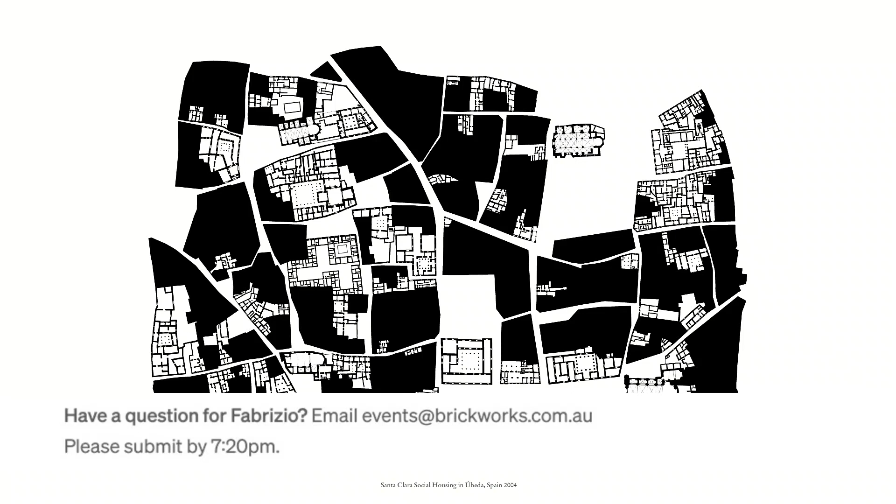It was a small project for a cultural center and social housing in a small town in the south of Spain. Essentially it tried to find a way to integrate a new architecture into a very sensible and delicate historical context.

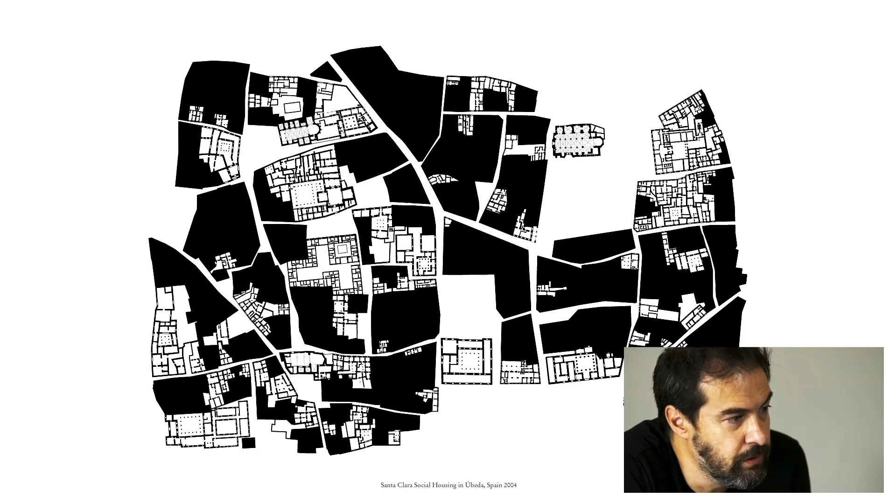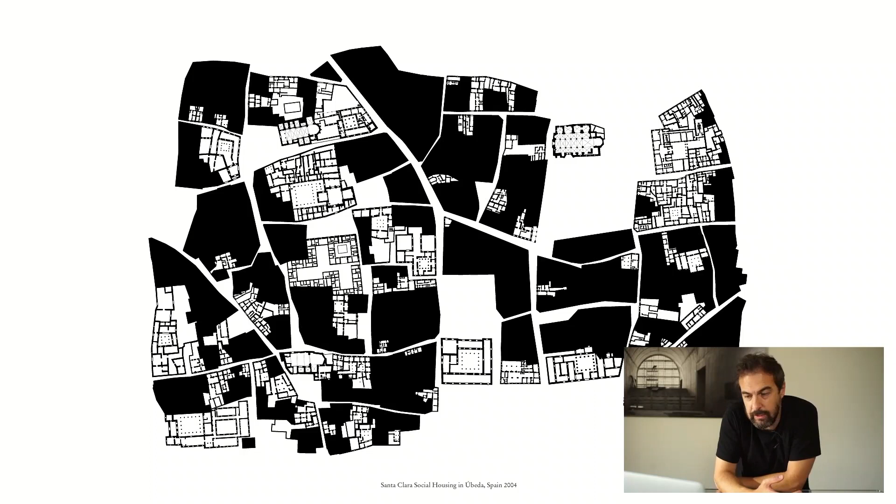In a way, this project marked our attitude towards architecture. Since the beginning, we tried to work with what we found. We tried to work with the specific condition of a place, to establish an intimate relationship with the context - physical context, imaginary context, or with the different realities that exist in a place. So this idea to work with specificity marks all of our first career here.

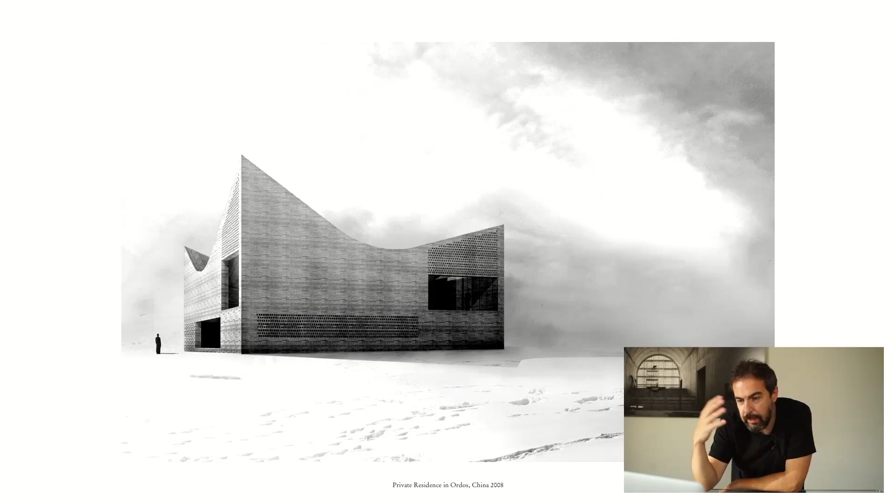In a way, our work is based on this idea to work with what we found, with this idea of specificity of the place, but at the same time we are conscious that architecture is an autonomous object. So at the end our project is based on a dichotomy. On one side we're trying to find this intimate and sensible relationship with the specificity of the place, but on the other hand we try to give a certain formal autonomy to the building. And exactly in this dichotomy, in this paradox, is where our work is placed.

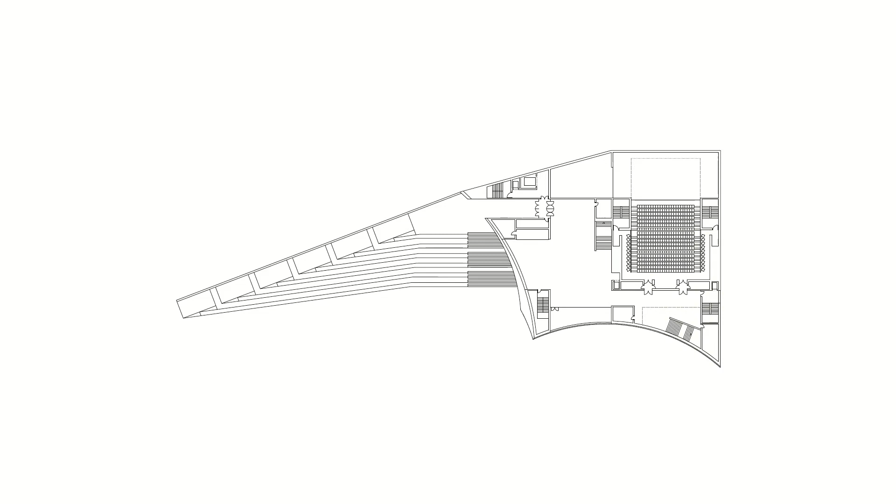Here, for example, this huge long ramp and stairs are the urban element able to connect the object through its contextual condition, and it marks the beginning of a promenade, a public promenade that goes inside the building. The interior, the foyer, was considered a covered plaza open to the sea, from where other connections move to the upper level.

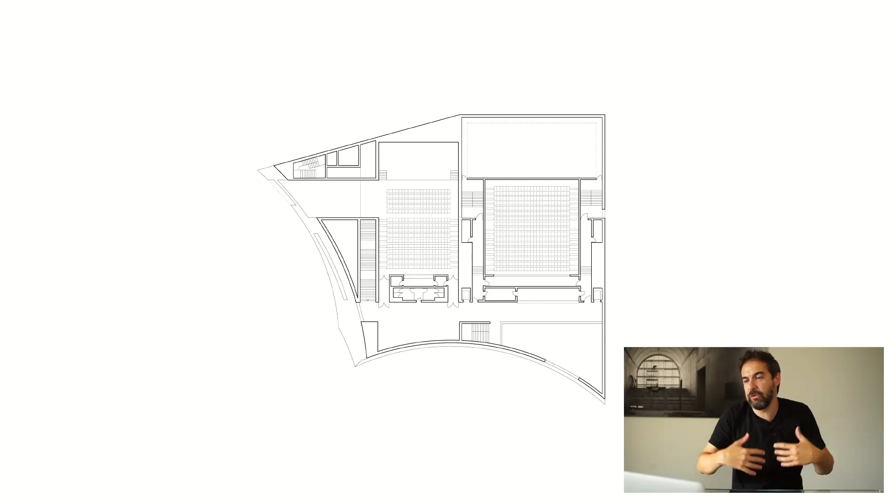All our projects have this plan trying to be very simple, very synthetic. They try to solve a complex program through a very simple form. Here the plan shows very clearly this duality that exists in the project: from one side, how the project is facing the geography, the sea, and on the other side, how the building conforms the new alignment for the city.

With just these two elements, all the project in a way is solved. Interior, there was a small theater that is present in this image.

More or less in the same year, in fact we finalized this project at the same period as the previous one. We made a project for a small office building that controls a wine quality facility, in a small town in the north of Madrid. This project has been really important in our career, because it's probably the project that explains in the best way our attitude toward architecture.

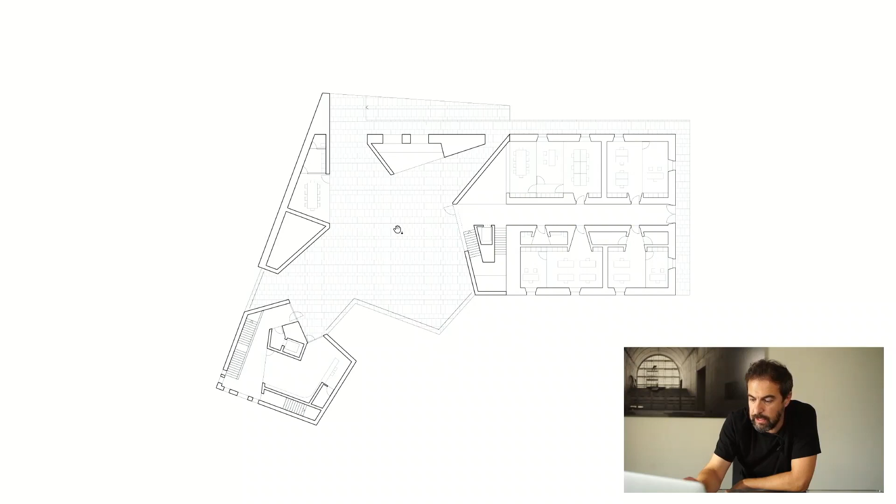There are several fragments that complete the existing context with what we have found there, and then the tower that marks the limits of the project and the public space inside. This is another view of the roof, in which, as I told you before, the architecture is just the frame of a new public space. The architecture is modeled by thinking about urban life.

You can find this kind of reflection not only in this project, but in all our projects. Similar to the very first image I presented, there is this effort to integrate new contemporary architecture into a historical condition, discovering new scenarios, new possible ways of new possible architecture.

After these two first projects, which were quite important for our career, we started to work around Europe, especially in Poland, and then later in Switzerland. The very first important project we made internationally was the Philharmony in a city called Szczecin, in the north of Poland, very close to Berlin.

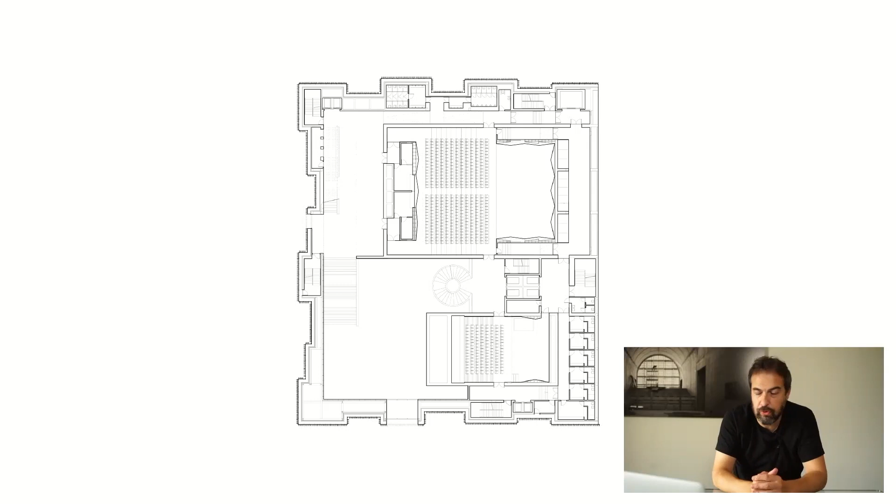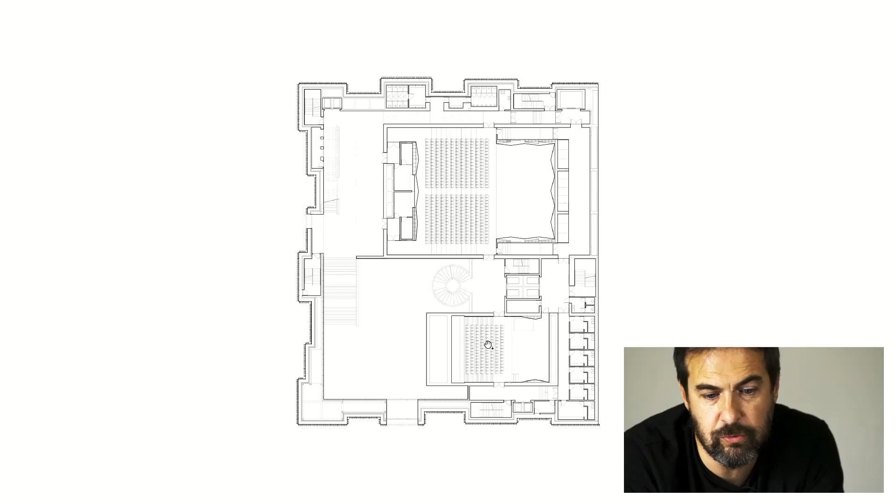The plan is a very complex project, but it's solved in a very simple and precise way. There is just this crown that conforms all the technical and vertical connections. This crown generates an interior open area, some kind of public space, and the two main uses—the chamber hall and the Philharmony hall—float inside of this void.

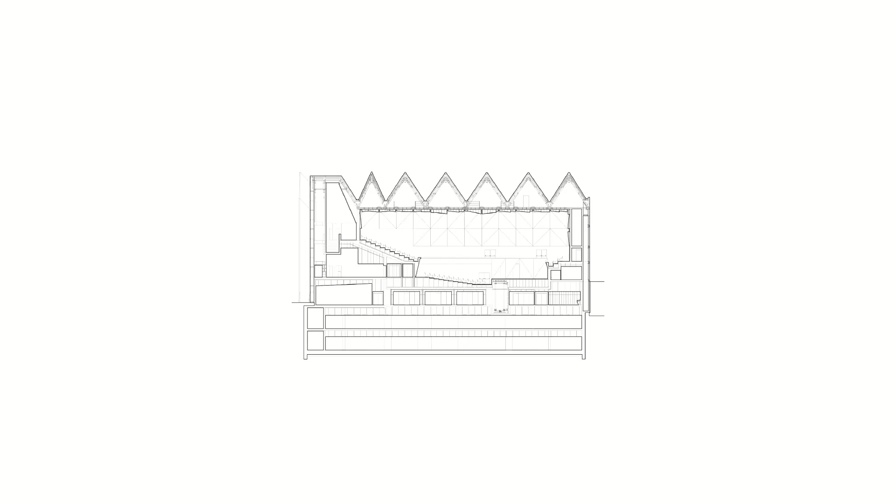So in this case, the public space goes inside of the building. The foyer is conceived like a covered plaza.

The other important use of the Philharmony, the big concert hall, is essentially a reflection about a certain historical typology of concert hall of Eastern Europe. A certain idea of ornament present in historical chamber concert halls has been adapted and transformed into fragments that are ornamental but at the same time technical elements that achieve the best acoustics inside this room. Again, it's a reflection about a certain specific tradition, even in these interior spaces.

The project was really the first step of a big urban renovation of an entire part of the city, and for that reason the project changes its appearance during the night. It tries to express the interior activity of the project and makes an effort to help renovate this area.

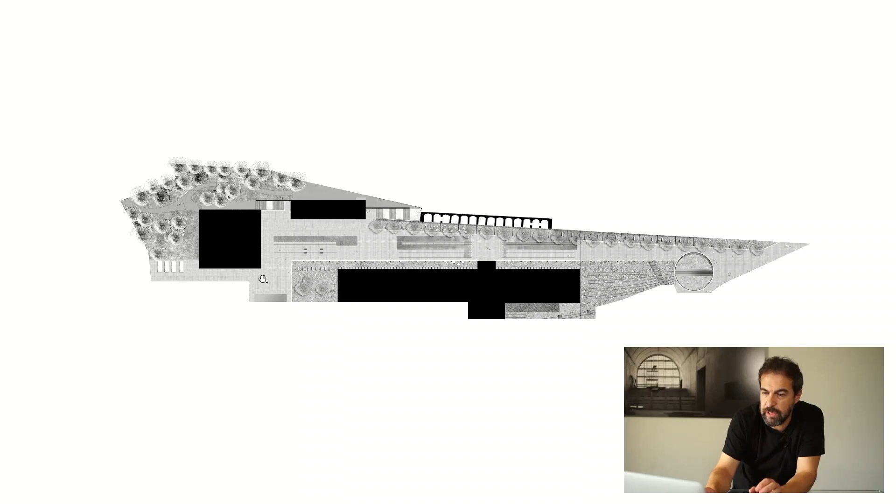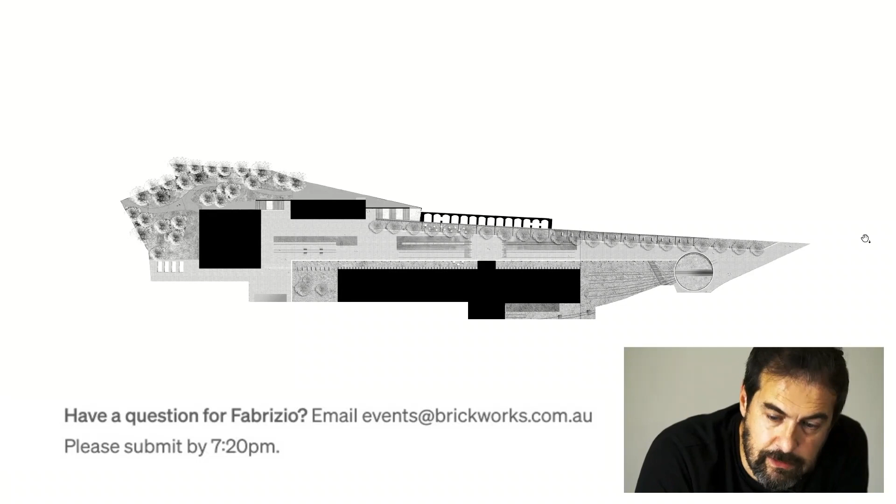This drawing clearly represents our strategy. At the heart of the project, we essentially defined a long plaza, a long esplanade able to connect with the plaza in front of the street. With this element, the effort was to link this new district for art with the city.

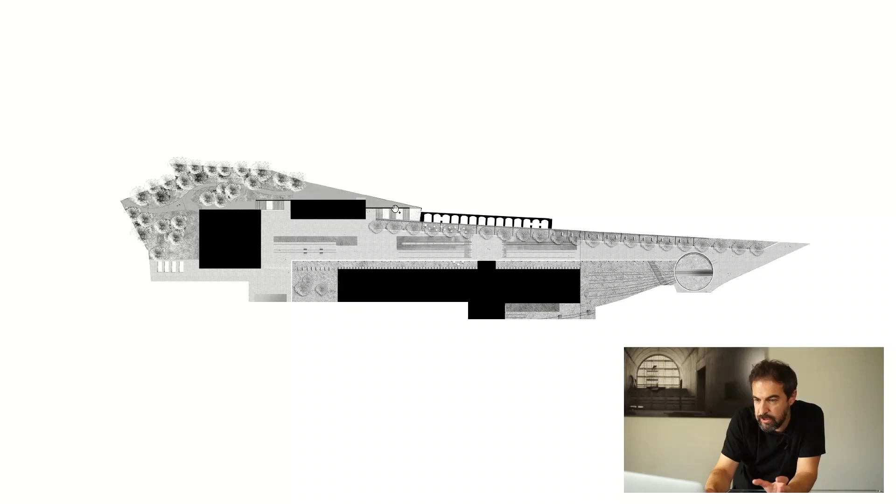The three museums essentially conform the frame of this new urban space, similar to the project I presented before, but at a different scale. This strategy was really important, representing the first step of the project: clarifying the urban condition of the site, and after that, the Museum of Fine Art that is here.

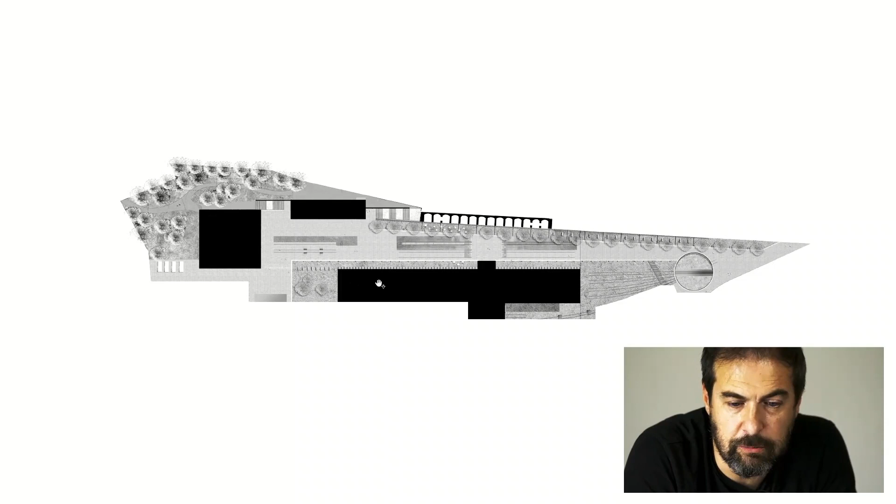The concept for the museum arrived in a very simple way. The project sits along the railways, with an inhabited wall able to conform this new public space and to protect it, and also to protect the collection hosted inside the building from the railways.

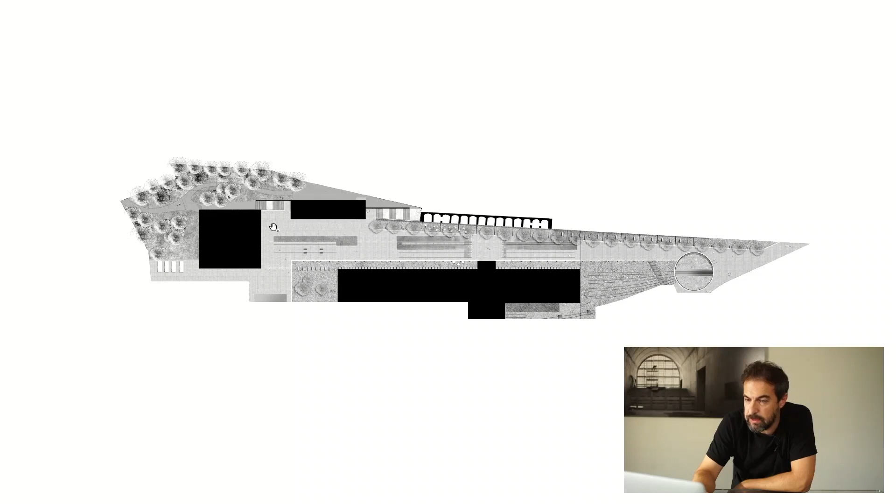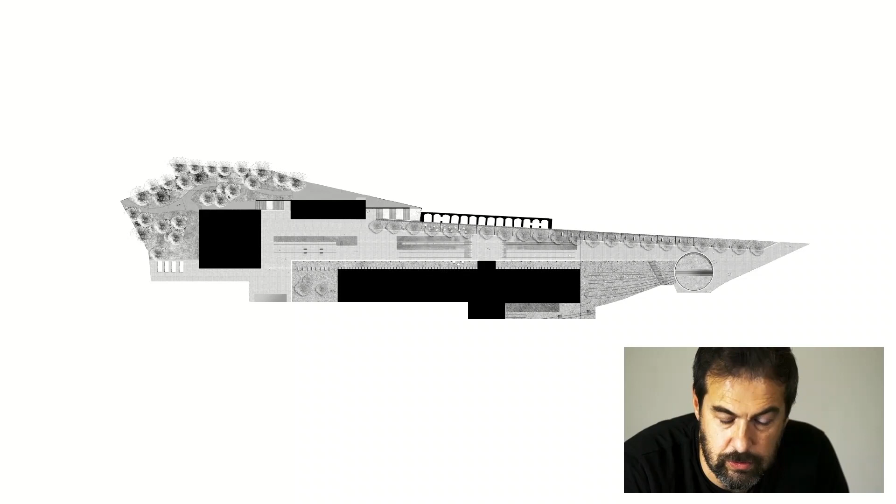In order to elaborate this strategy, several old buildings were demolished, but we preserved certain fragments here, there, and also this one, because our intention was to conform a collection of fragments of the historical building to give continuity to the memory of this site.

There is a certain industrial resonance in this project. We wanted to preserve this industrial atmosphere that was present in this area, which essentially was an area for the maintenance of the train before. So the museum is this kind of long inhabited wall, very abstract in a way, an independent building, but trying to reuse this industrial atmosphere to conform the new project.

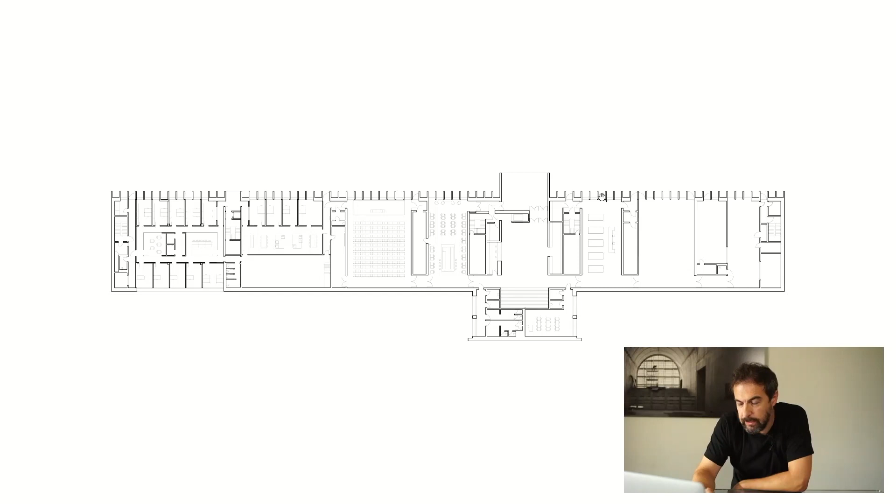Here on the ground floor, essentially the entire floor is composed of public use: the auditorium, restaurant, the foyer, etc. This vertical element gives a kind of abstraction to the facade, but at the very end what it permits is to achieve a huge permeability between the exterior public space and the interior.

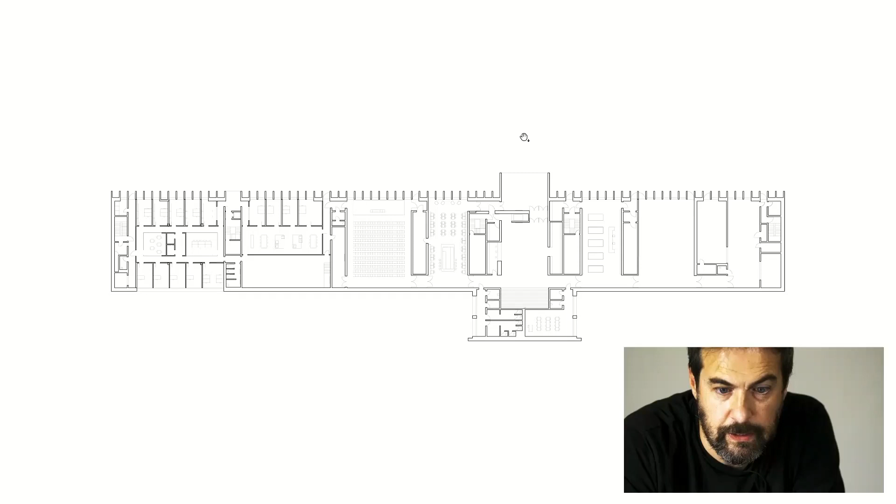The fragment of the pre-existing building is the key element because we reuse it to conform the new foyer, the main entry of the museum. This entry is marked through a simple porch that opens a void into the vertical rhythm, and when you arrive here, you discover the new foyer.

Around the foyer there are vertical connections, some small spaces before arriving at the gallery, working with light and simple materials. The exhibition on the first floor, the galleries, are very informal in a way, bringing light through the north facade and in between the vertical elements. The upper floor is essentially characterized by zenithal light.

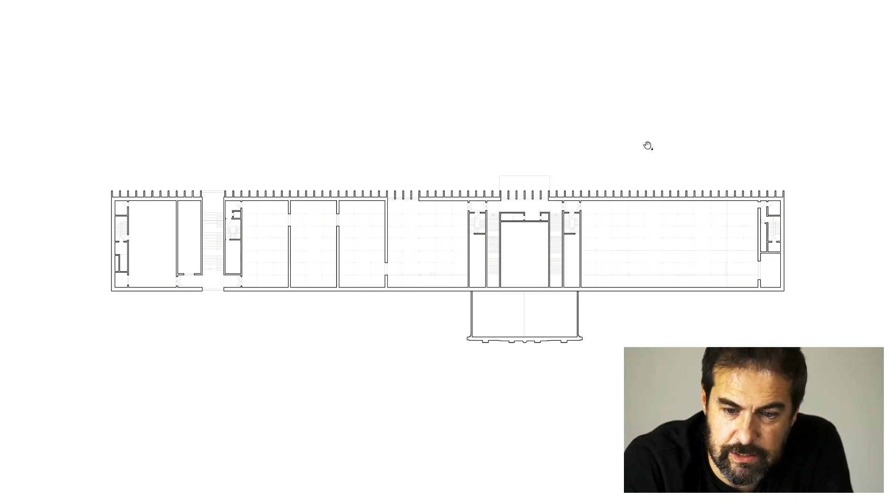This plan shows the effort we made to design very simple architecture. This huge museum is composed of just five cores that define the main spacing, dividing in a very pragmatic way the space for the temporary exhibition and the permanent collection. Everything is very pragmatic, about the reduction of the element to its minimum.

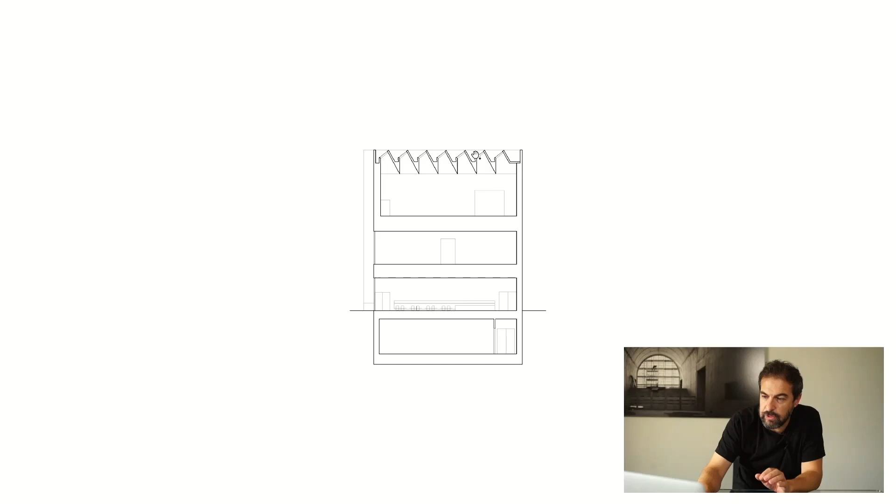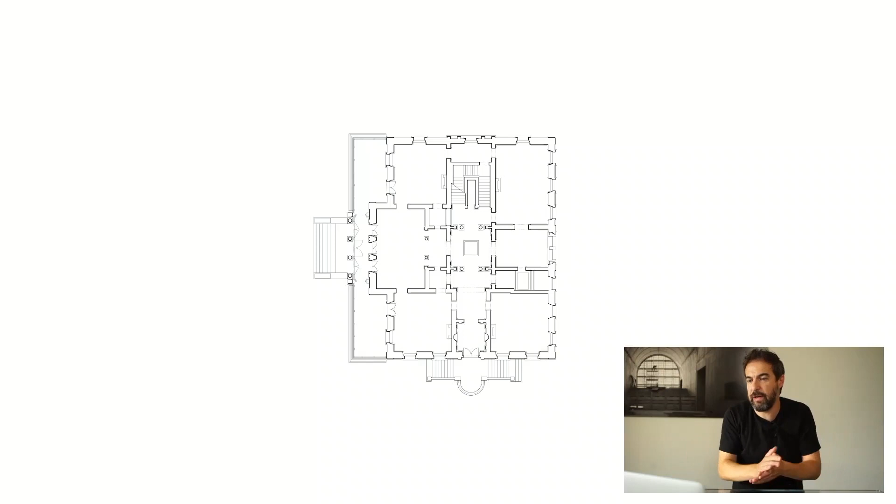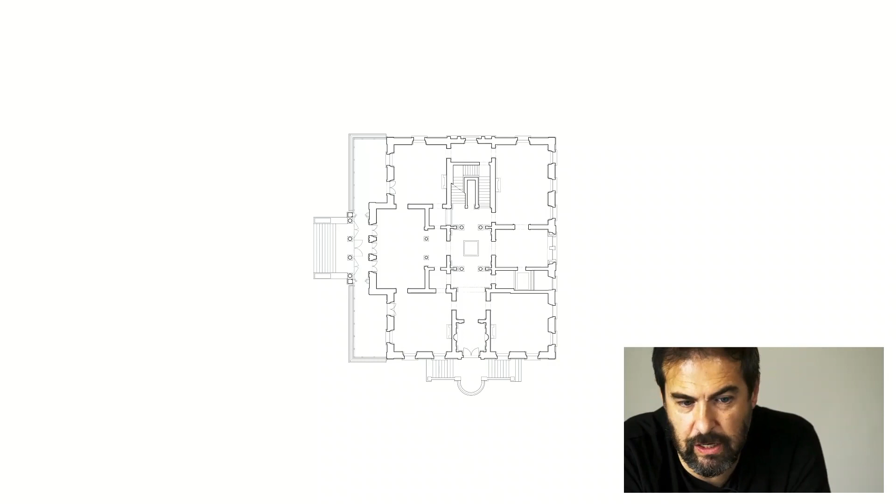The plan, as you can see, is directly inspired by La Rotonda of Palladio, with a double symmetry marking a very clear central void. And the decoration around the building has this kind of Orientalist condition. So these two conditions marked our approach to the project.

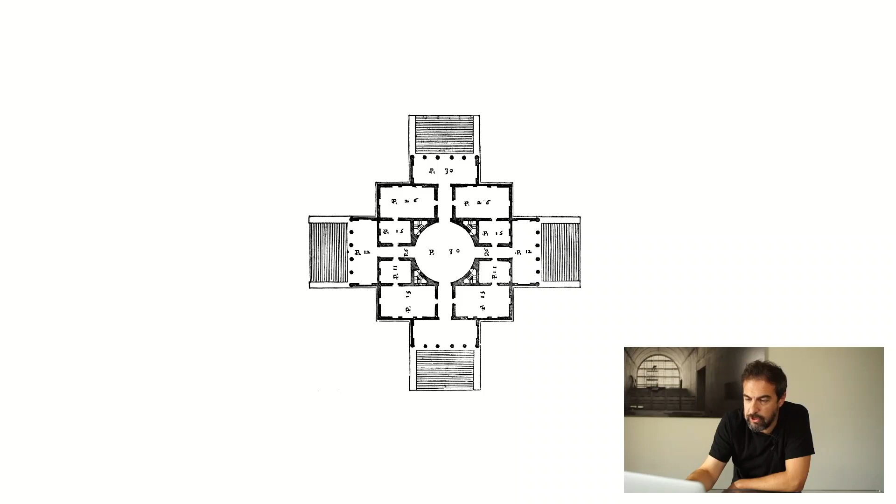First, this idea of a kind of absolute architecture—this is the original Palladio La Rotonda, conformed by this double symmetry, which became important in our reflection. Step by step we started to imagine that the extension of the historical museum should work as a diptych. The same identitary element of the pre-existing building should also conform the new one, so the old and new can create this kind of new diptych, in a way.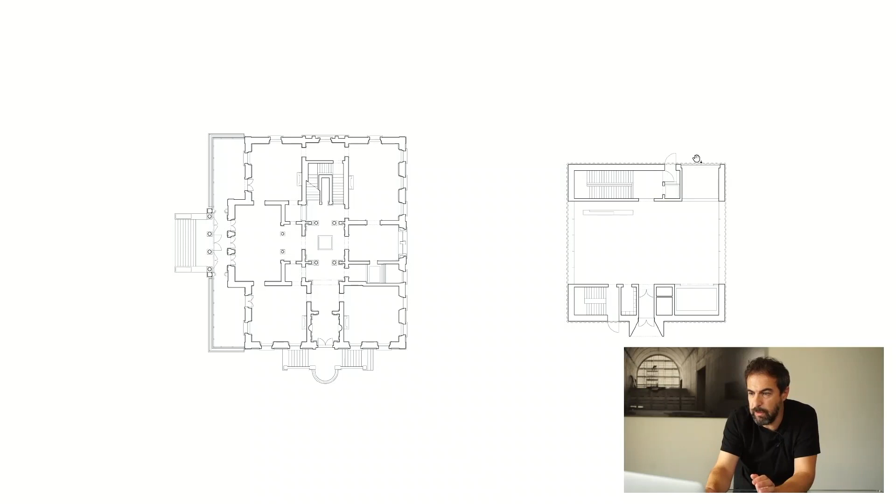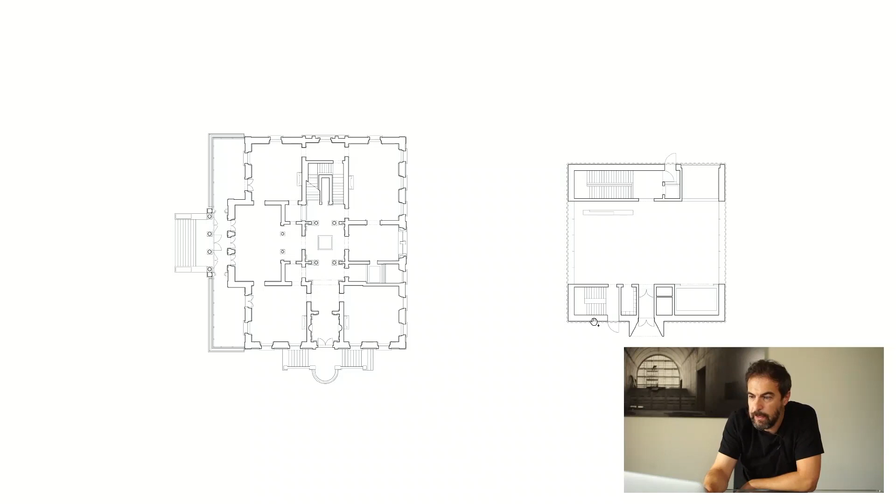Here is the plan that shows the new ground floor of the extension. The geometry is exported from the original building—an element that works again with a double symmetry. Everything is combined in just two very simple cores that define a central foyer, a small covered plaza. Again, the project is very reduced and synthesized into just a few elements.

So at the end, I always present the project as a neo-Palladian building, because the plan—and we will see the plan—is directly related to the historical villa and to this kind of ornament that marks the facade, inspired by this Orientalistic motif.

Again, it's a building that conceptually works with the same elements we found there, but transforms them into a new architecture. And even if it's difficult to notice here, we tried to reduce the footprint of the building as much as possible in order to generate this kind of mineral garden around it, or some kind of basement that supports the new architecture.

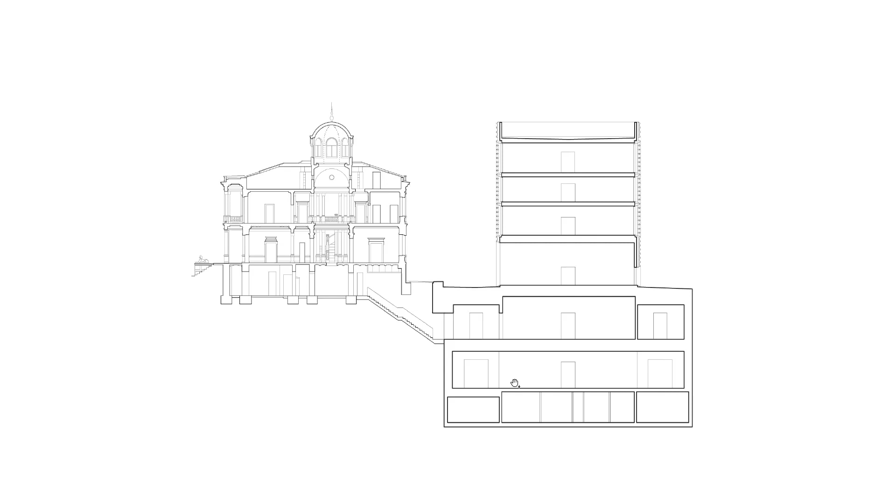In order to generate this public space, we took a very radical decision: the main exhibition areas are underground, and what appears outside is just the public uses. In this way, we can adapt the scale of the building to the historical building and conform the new gallery in a more general area.

The foyer is directly related to the historical building, with the main stairs going down in concrete, and then we arrive at the level of the permanent gallery. This plan shows in a quite precise way this sequence—the composition of the plan is made up of a sequence of rooms following the idea of aggregation present in many Palladian buildings. So the relationship with the historical building is quite clear in a way.

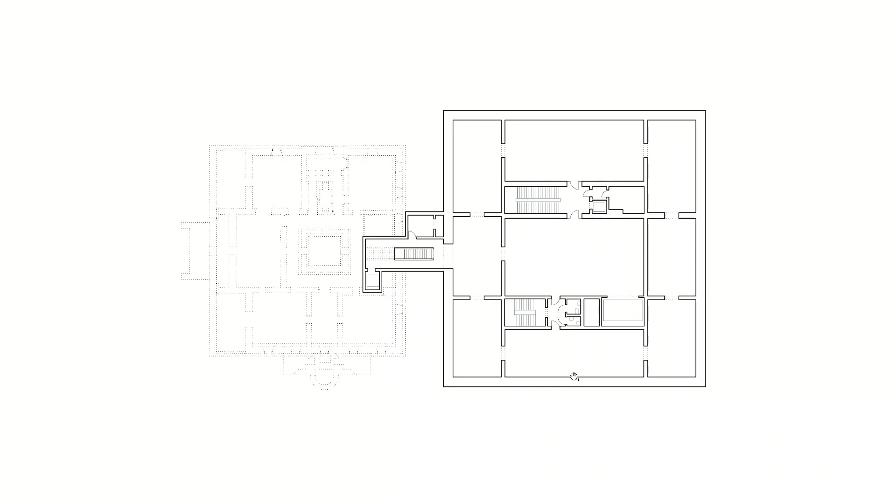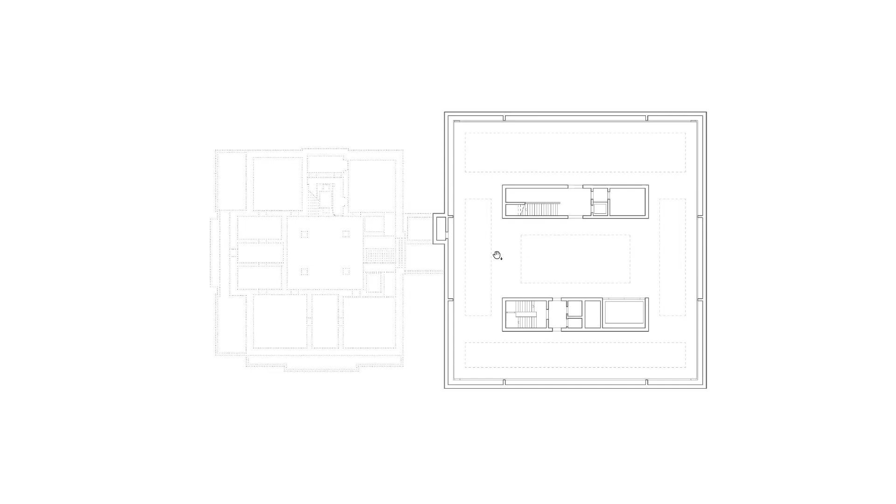Some images of these rooms. The lower level, dedicated to temporary exhibitions, is essentially an open plan characterized by just two cores, and the rest is free space for art. And these are some images of this level.

This kind of bas relief conforms this kind of ornament, but at the end it's not an ornament because it's something that permits hiding all the technical elements that appear in the facade. It's composed by prefab concrete elements.

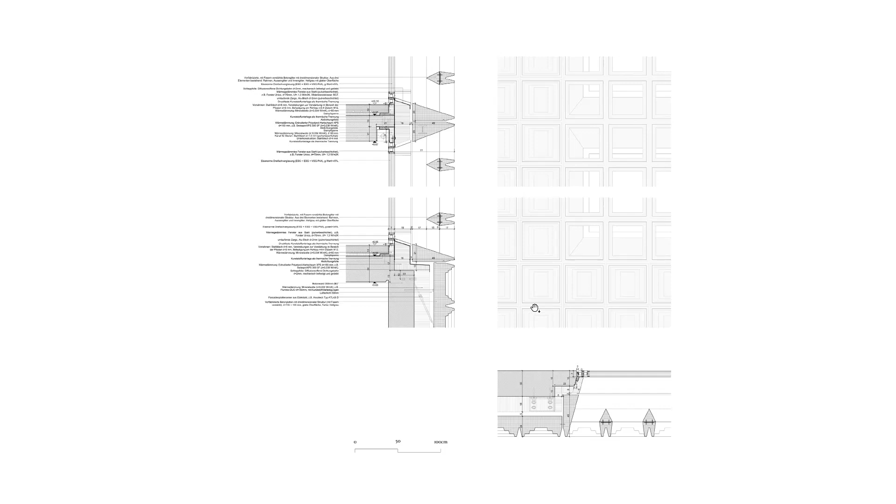You can see in this detail that it's carved and conforms this square-shaped pattern, creating a vibrant surface. The entire concrete facade is working in this way, so sometimes it's just a mass, sometimes it hides windows, etc.

We use the same motif also to mark the delivery door, which is the unique element that creates a dissonance inside of this double symmetry that organizes the entire project.

This element is quite relevant because in order to reduce the footprint, create the plinth, and give the right scale to the building, we took a quite radical decision: the foyer is the foyer, but at the same time is the delivery area for the museum. This element is, at the very end, what permits the entire project to work well. For that reason we marked this special element into the project.

The last and most recent project we have finished is a Dance Academy in Zurich, Switzerland. It's a small project that sits along the Limmat River in a very beautiful and fascinating area. It was an industrial area, but during recent years there has been a huge change, so it's a context full of different buildings, industrial mixing with new residential buildings, etc.

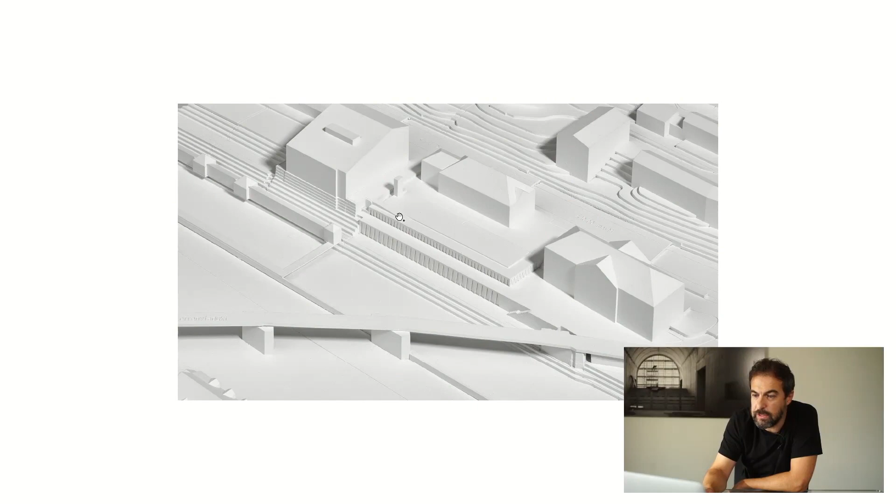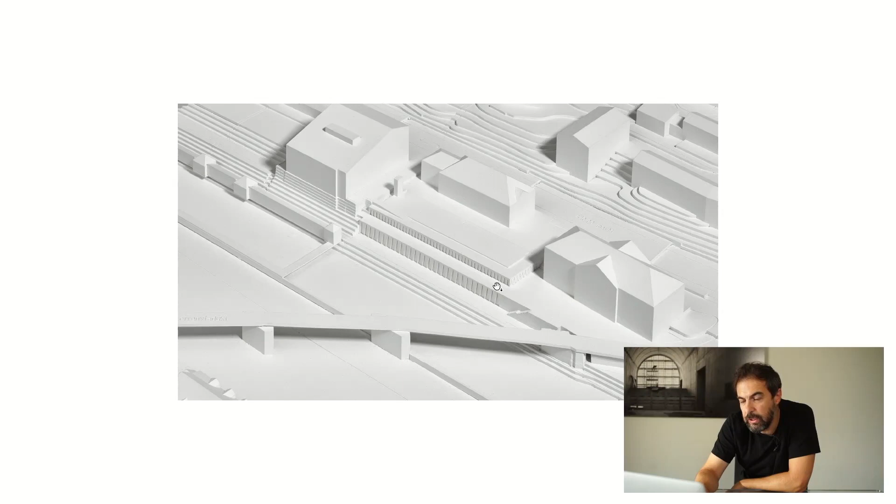In the model you can see that in this case the project doesn't define an object, but defines a topography. Our intention was really to generate a new public space along the river, permitting citizens to move again along the river and also at this level and the upper level, giving back prominence to the historical buildings that sit nearby.

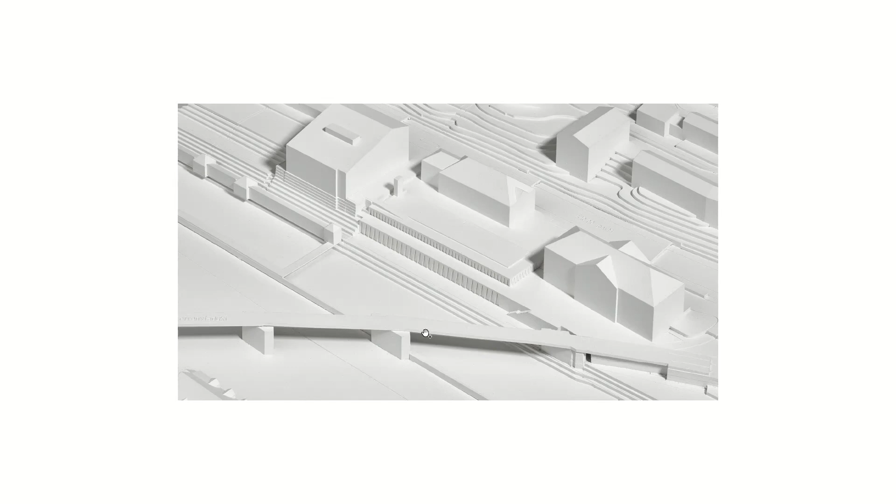Here you can see how the building is inserted with this element that represents a historical bath in wood, very beautiful. Here there's a passerelle, and around here another bridge, metallic infrastructure, etc. All this kind of infrastructure marks, in a way, the form and shape of the building.

So the building at the end is just a plinth, above which sits the other residential building. The effort of the project was really to reactivate this area and recreate a new promenade along the river.

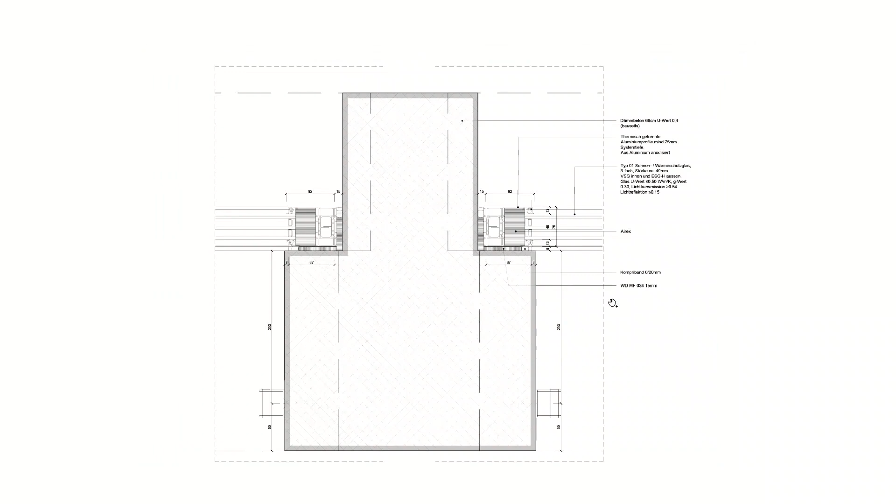For that reason, we moved the entry to the Dance Academy from the upper street to this new level, forcing people to go down, arrive at the river, and enter into the new foyer located in this area. The effort again was really to make a simple building able to create a new part of the city.

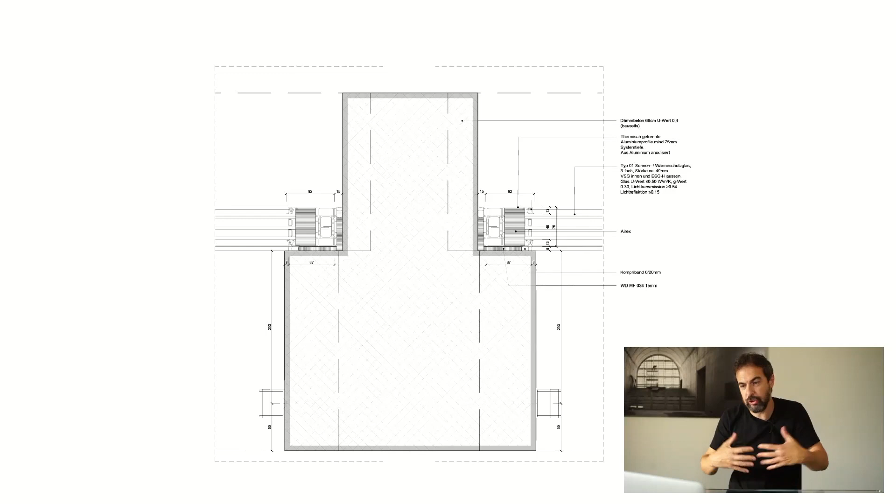There is one specific thing for this project that is really important: everything is built in concrete, with insulated concrete, so there are no layers of insulation. It's just mass in concrete, and the frame and carpentry are just connected with the concrete structure. This is an effort to work just with structure, to reduce architecture to structure and nothing else.

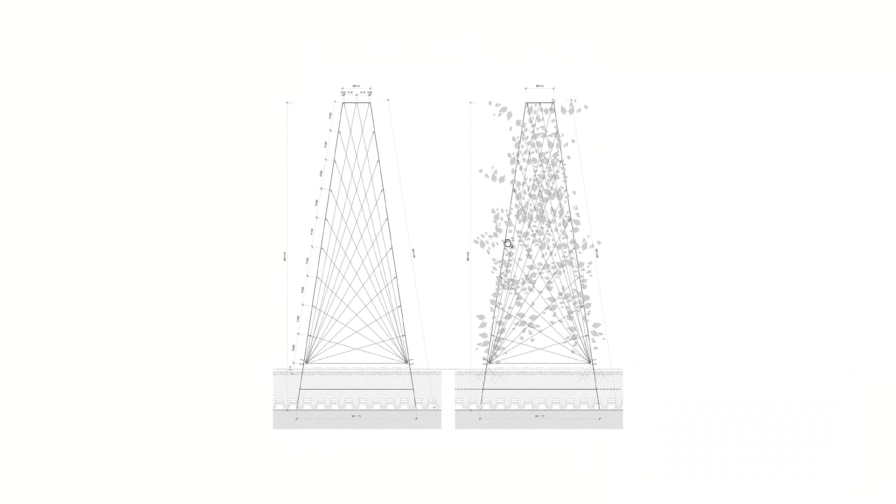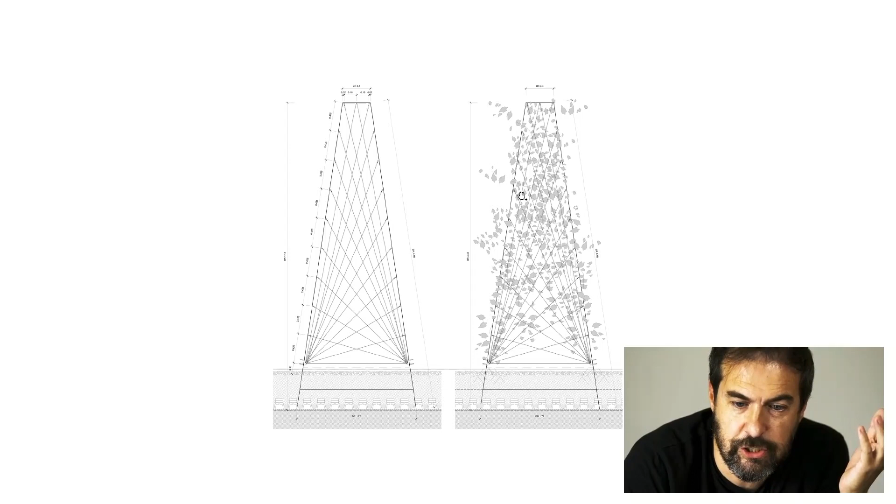This is a really important thing in Switzerland. We proposed to the authority to use vegetation as a tool to control the solar radiation. So we studied with engineers, agronomists, and other people which kind of leaf and flower we should use, and we tried to plant this element in between the columns. This apparently simple system is the first time a building uses vegetation as a technical element to control solar radiation, and in this way the project is really at the avant-garde in a way.

The idea is that in the future the project, step by step, will be integrated with nature, with trees appearing in front, and vegetation that will grow up in the middle of the rhythm of the windows.

Also, this triangular form permits control of the lighting, more light in the lower part, less light at the top of the facade. But at the same time it's a form that makes sense structurally, because it permits working with this concrete that doesn't have a lot of mechanical resistance, so we avoid having to work with more material essentially.

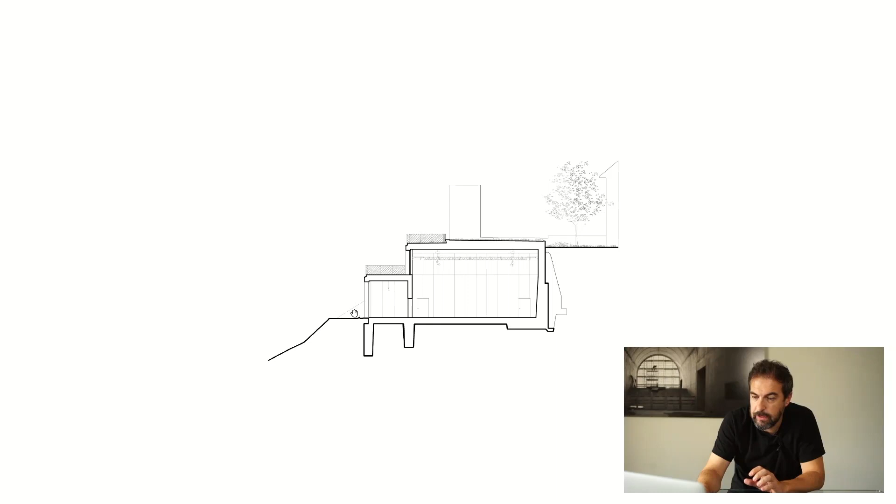The section is very pragmatic, creating this stepped building: the foyer, the main dance studio, and the upper floor, which is just a garden that integrates the building into the surroundings.

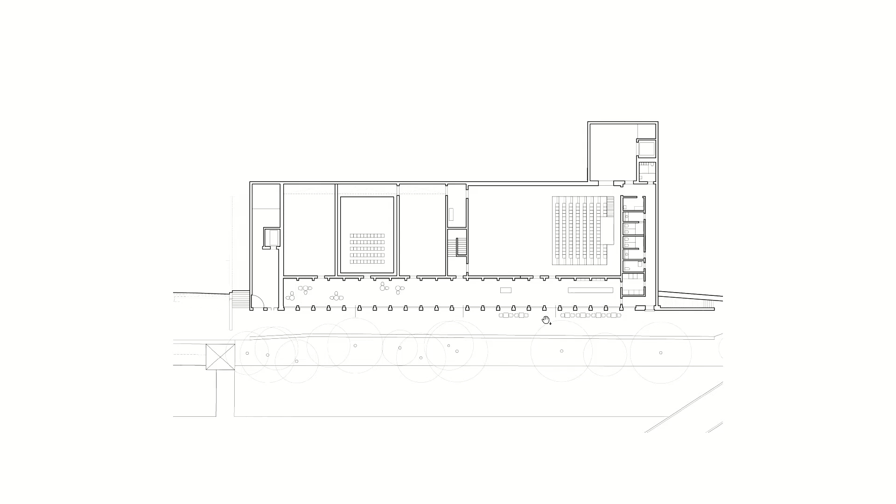So more or less these are the main projects we have built during the last years, since we started the office. After working for several years here in Spain and Europe, the office is now facing two very important new challenges. We started recently to work in the US, especially with two new important projects for us related to culture and art. This is the very first time I present this project, and these are the projects that will mark the future of the office for next year. They are still confidential, so I cannot show you many things, but I would just like to finalize this presentation with a general comment about it.

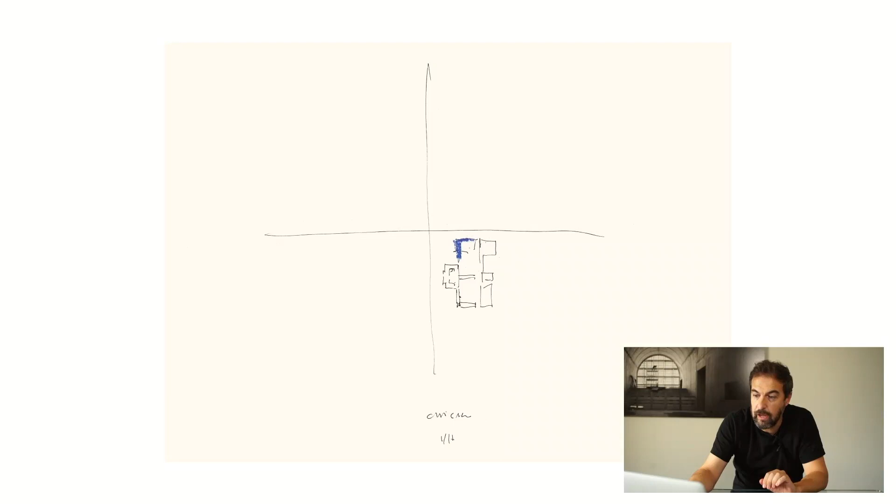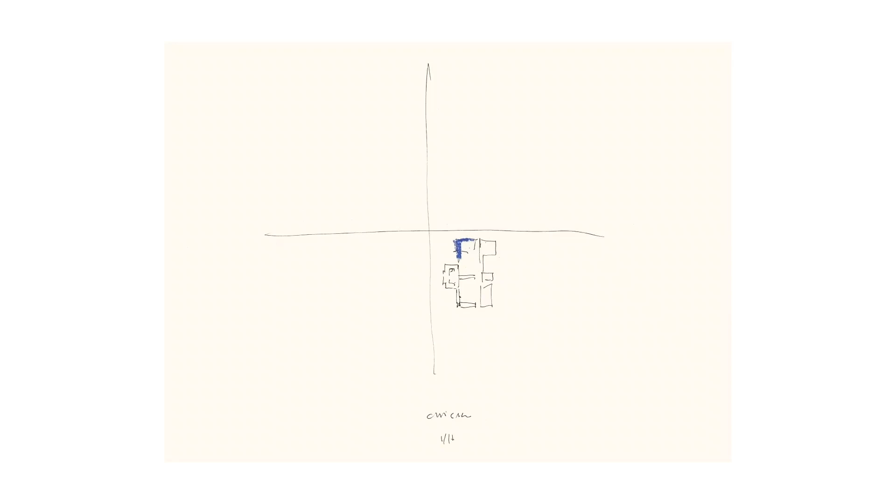The campus is quite big, taking up about 4 blocks of downtown Chicago, and it sits in the middle of the garden. So our project will really be about a general reorganization of the campus. The main point will be trying to transform this inward-facing museum into an extroverted museum, able to recuperate the civic and public condition necessary for this kind of project.

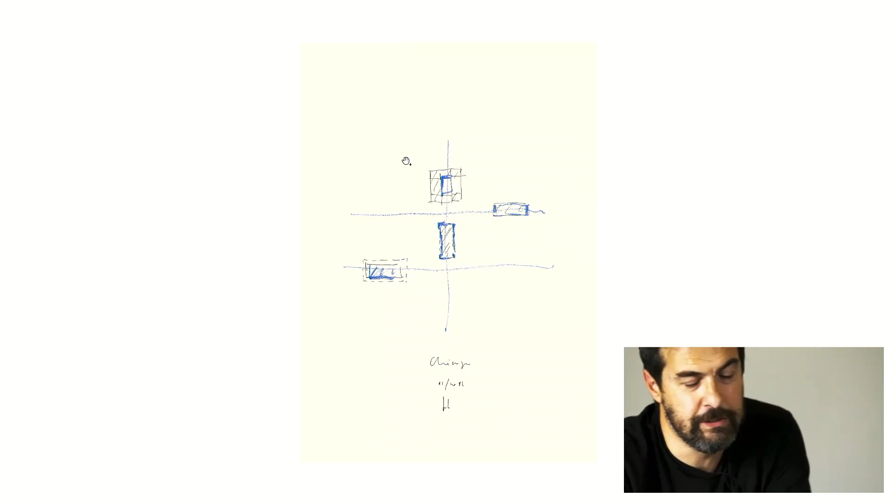Essentially the project will be based on four main strategies, and every strategy will try to reestablish a missed link, a direct connection with the city, with the train, with the gardens, and with the lake. Hopefully in a few years we will have the opportunity to start the work, and maybe in the next presentation I will have the opportunity to present this new project. So, thank you.